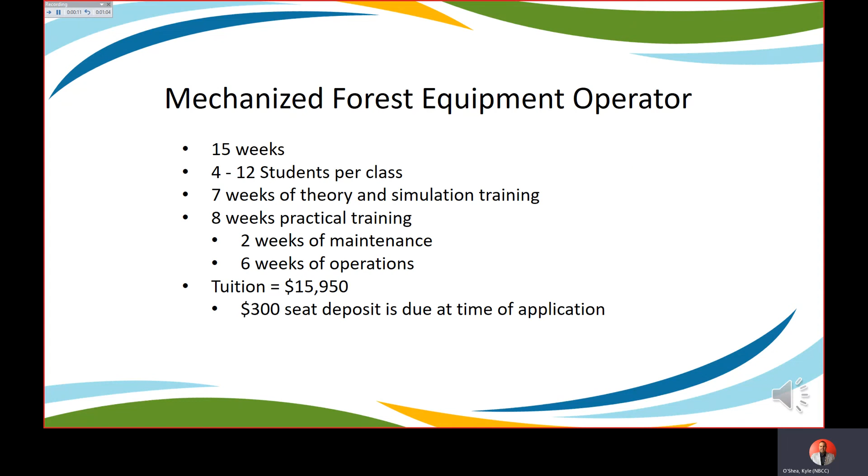The program is 15 weeks in duration, and the training begins at NBCC Miramichi campus. Class size is from 4 to 12 students, and tuition is $15,950. Students spend the first 9 weeks on theory, simulation, and practical training at the campus before heading out to the field to begin the practical training on a block provided by a forestry company.

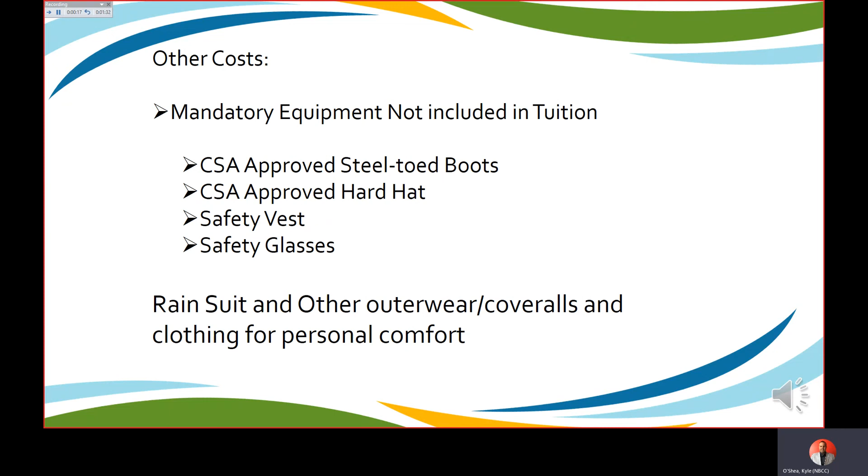Students will need to incur additional costs for mandatory personal protective equipment required for the practical training. These items include CSA-approved steel-toed boots, hard hat, safety vest, and protective eyewear. Be mindful as well that a rain suit and appropriate outerwear, such as coveralls, may also be required for work outside in the elements at the work site.

The Mechanized Forest Equipment Operator Program is a certificate program. Upon completion, graduates will receive an NBCC certificate and can attend the official graduation ceremony in June. Additionally, students will receive a transcript of marks, operator wallet card, first aid certificate, transportation of dangerous goods wallet card, and WHMIS safety wallet card.

During the first 9 weeks, students will learn various competencies, starting with working safely on mechanized forest operation sites. Students will learn various sustainable forest initiatives, such as tree identification, introduction to GPS, and navigational systems and mapping. As well, students will gain knowledge with regard to best management practices with respect to harvest site locations, layout, buffer identification, product specifications, and quality, just to name a few.

As mentioned, the training is a blend of theory and practical training, so maintenance will be incorporated into the training schedule. Equipment maintenance will include how to perform and document equipment inspections, fundamentals of engine and powertrain maintenance, crane and harvesting attachments, basic electrical, hydraulics, and bar and cutting maintenance. Students will also practice various exercises on the simulators with respect to mechanized forest equipment cutting techniques.

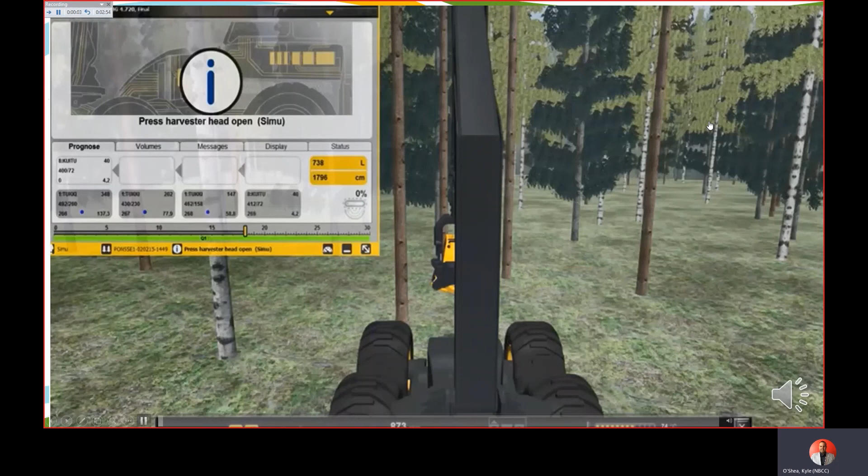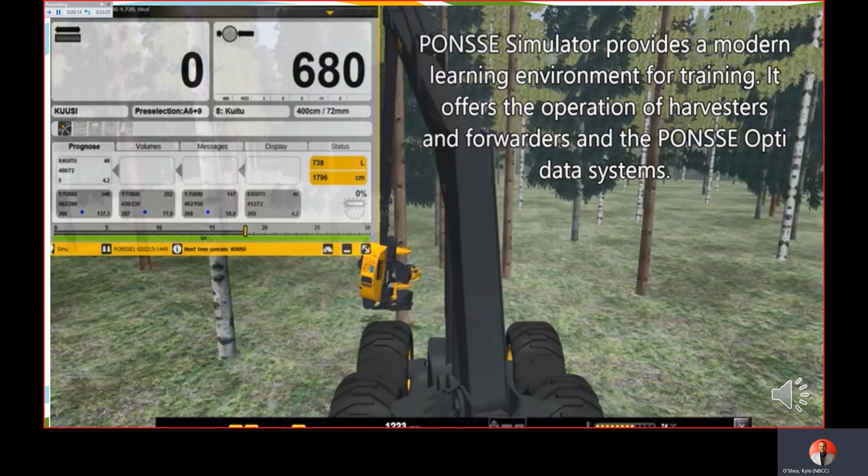This short clip is a screenshot from one of the simulation exercises used during the training. The simulators used in our program are Ponsse and John Deere brands. Both are excellent products and are very popular equipment brands in the mechanized forest equipment industry. The controls and exercises are very realistic, and they allow the students to gain the hand-eye coordination necessary to learn the controls before ever sitting in an actual machine. This type of simulation training reduces the amount of damage to the actual forest equipment by allowing students to gain the fundamental operating techniques in a simulated environment without causing damage through practice.

The labor market need for mechanized forest equipment operators is currently very strong, and the outlook for the future remains robust. A rough forecast from industry associations and employers indicates the need for approximately 500 new operators over the next 5 to 10 years. Industry is currently in the process of working with apprenticeship to have mechanized forest equipment operator as a certifiable trade in New Brunswick.

The estimated unemployment rate for this occupation is below average compared to other occupations in the province, and the average age for workers in this trade is estimated to be 42 years old. The national occupational classification for mechanized forest equipment operator is 8241, and the starting wage for this occupation is approximately $18 to $20 per hour.

Before discussing the program outcomes, admission requirements, and application process, I would like to show a short video depicting an overview of the Mechanized Forest Equipment Operator Program here at NBCC Miramichi.

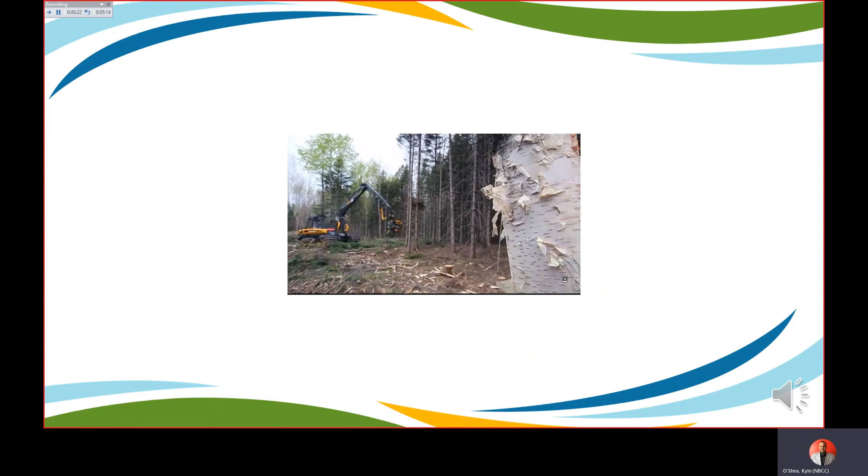To be able to come into a course for only 15 weeks and then have a job opportunity sitting on your doorstep is awesome, especially in New Brunswick. You're getting way more than minimum wage, and it feels really good. The demand for forestry operators is really high right now with everybody retiring clear across Canada, and especially in New Brunswick, you're looking at a starting wage in the 17 to 18 range, up to 25 for experienced operators.

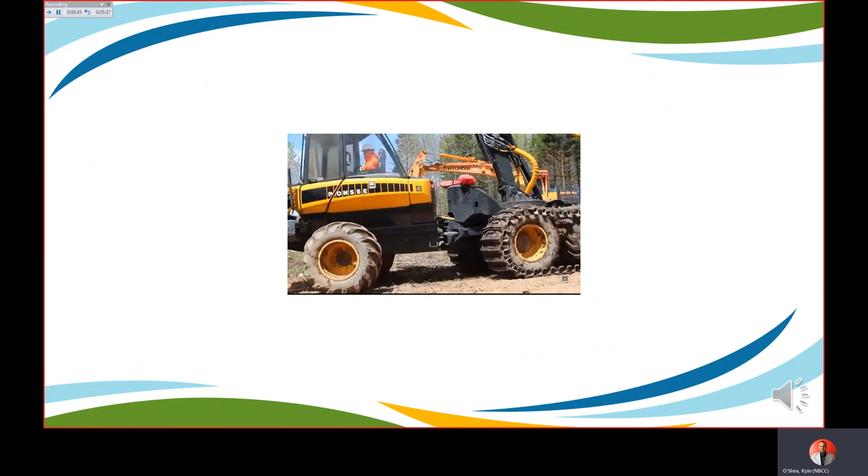So the course is 15 weeks long. It has a 7-week theory classroom segment to start with, half of that is simulator time, and then we move to the field for 8 weeks. During our classroom segment, we go through first aid, WorkSafe, TDG (transportation of dangerous goods), SFI certification, environmental laws and regulations, proper wood utilization, and different harvest techniques.

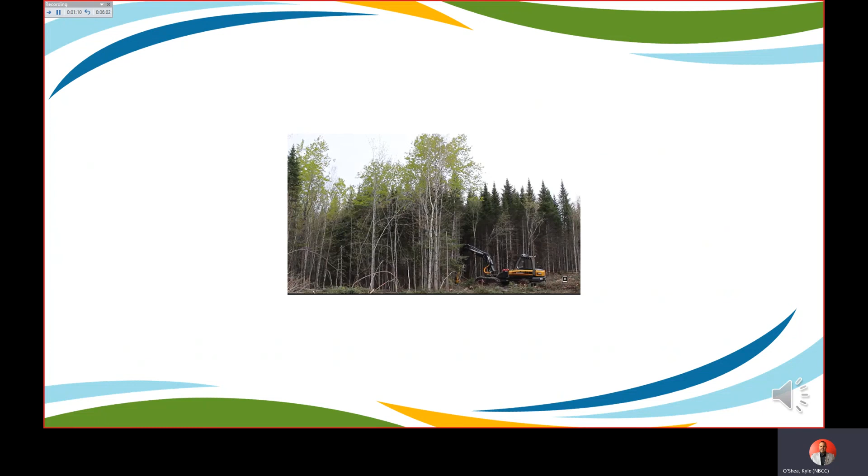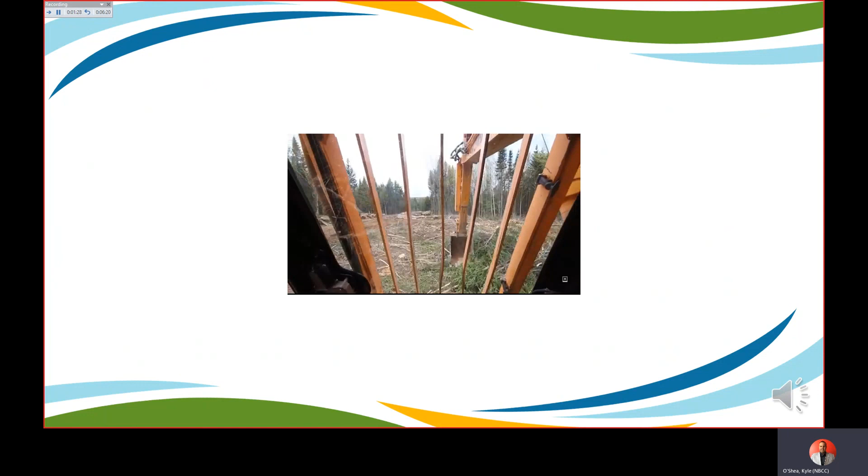In the background, we have our Ponsse Beaver, equipped with a Ponsse H6 harvester head. It's the main machine in the operation, and it cuts and processes the wood. We have a Rottne 9-ton forwarder that forwards the wood to roadside, and we have a 210 Hyundai excavator that does double duty, outfitted with a Log Max harvester head or a bucket for road building.

Lots of hydraulics, lots of hand-eye coordination. You really need to keep your head on a swivel at all times. You're dealing with a lot of heavy loads, moving over rough terrain, sometimes working in very tight quarters within the woods.

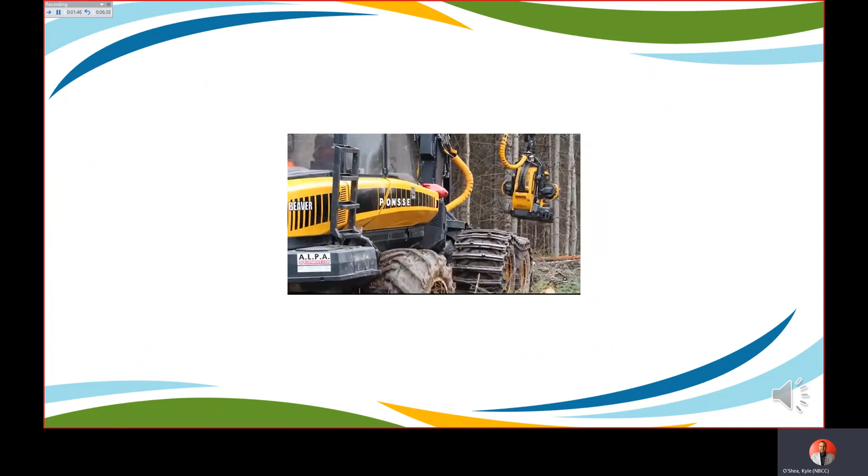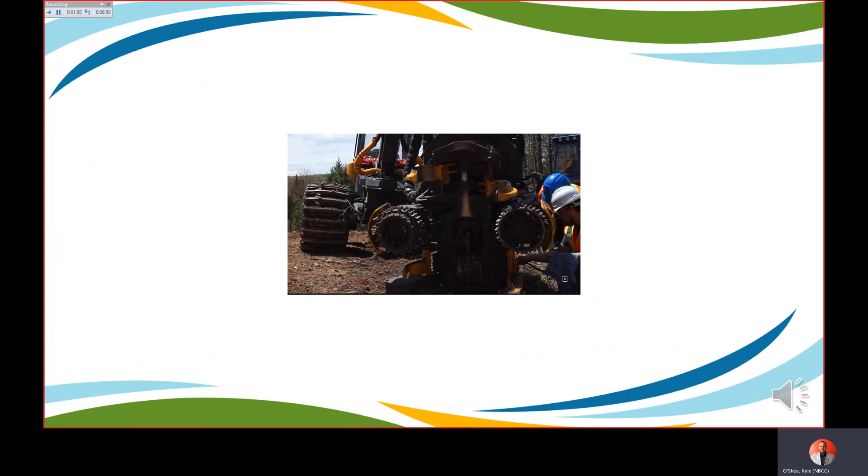In the last 10 years in my military service, I spent a lot of time outdoors. I found that I enjoyed being outside, enjoyed the fresh air, the wildlife, the nature. This gives me an opportunity to make that my entire job.

We've learned a lot in such a short time, and that's because our instructor's been so great. He's willing to put one-on-one time with you anytime you need it, anytime you ask for help.

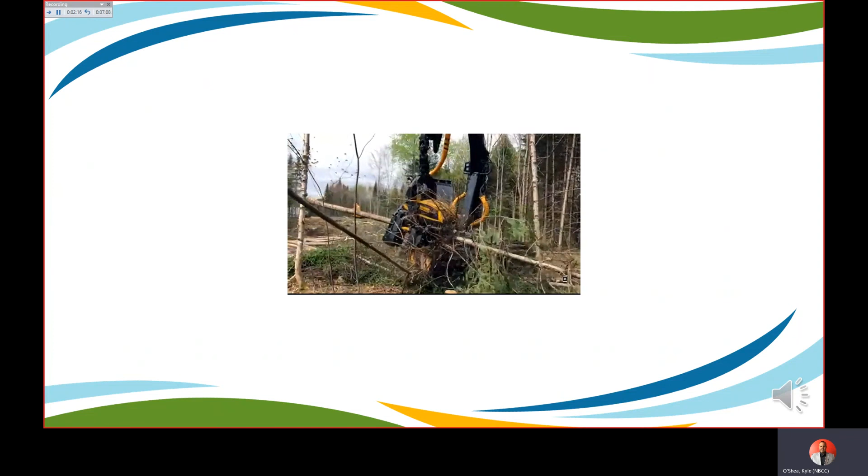So to get into these machines and have that machine just do exactly what you want to do on foot, but with half of the labor and half of the stress, it just makes it a lot easier. To be able to drop as many trees as we do in a day feels really good, because I would never be able to do that with a chainsaw.

The ultimate goal of the program is to provide students with the skills and knowledge required to find employment with a forestry contractor and to work safely and productively as part of their mechanized forest equipment operations team.

Various program outcomes and learning competencies include: operate harvester, forwarder, feller buncher, grapple skidder, and delimber equipment on a work site; promote sustainable practices in tree harvesting operations; evaluate worksite areas and take action to handle potential hazardous situations; perform basic preventative maintenance and repairs on forestry heavy equipment; and act in accordance with health and safety practices and procedures that address individual and group needs.

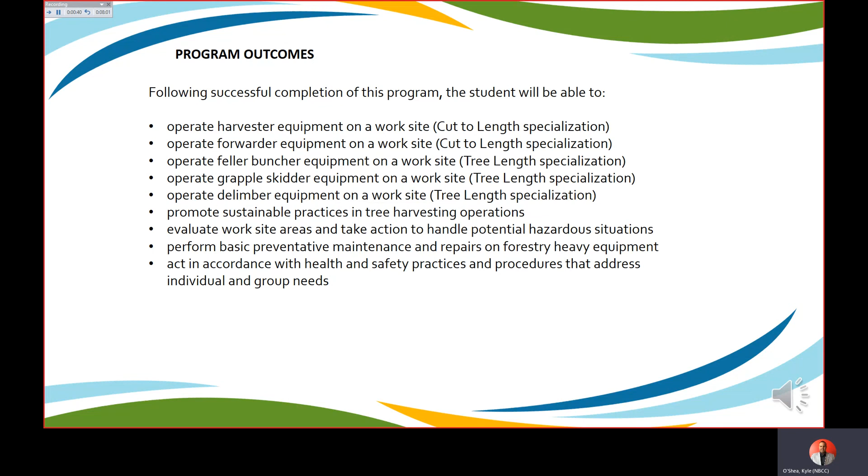Admission requirements are a high school diploma or adult high school diploma, GED diploma, or high school equivalency.

As additional information, it should be noted that the practical portion of the training may occur anywhere in the province, depending on where NBCC can retain a block to cut. Once students graduate and enter the workforce, employers may expect their staff to travel to multiple work sites, and shift work may be required.

The application process starts with making contact with us to start the application. Qualified candidates will then receive a conditional acceptance letter, which outlines training dates, tuition costs, textbook costs, and other incidental equipment that may be needed.

The student will then pay a seat confirmation fee of $300 to secure a seat in the program. It should be noted that tuition is required on the first day of training unless the student is receiving funding assistance, in which case we will need a copy of the funding letter.

Financial options are provided to the student. The student would then make contact with our office when they are ready to submit their application and pay the fee deposit. An acceptance letter is issued at that time.